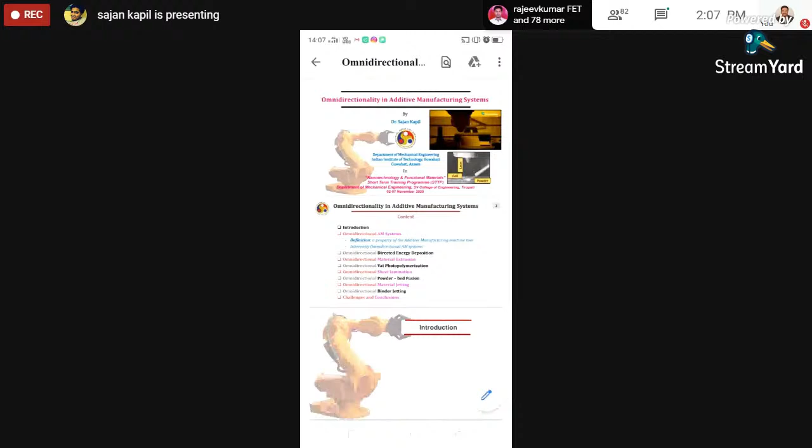Sir, sorry to disturb you, sir. Sir, if possible, if you are sending it to our team, our coordinator will share the screen, sir. You can speak from them, sir, if that is also possible. But now I think I have opened it in the right device, now I think it will be visible. Now it is correct, sir. Perfect, sir. Yes, sir, this is a convenient mobile. So I'm sorry, sir, I'll try.

Okay, so good afternoon to everyone. My name is Sajan Kapil. Today I will discuss about a very interesting phenomena which is called as omnidirectionality in additive manufacturing.

So far this phenomena was not really highlighted earlier by the experts, and we were using it since a long time. There are unfortunately some videos I may not be able to show you, but in the end of the lecture, if the internet gets established, then I can transfer to my PC and show the videos also. So you need to see a bit carefully now to the diagrams, so that I will be able to explain a few things.

So in this case, as you see on this right side diagram, there are two figures, one on the top and another on the bottom side. The top side diagram shows the latest type of DED system - DED means directed energy deposition system. While the bottom side shows the first one, which was invented in 1989 by Professor William Steen - the conventional or the first DED system.

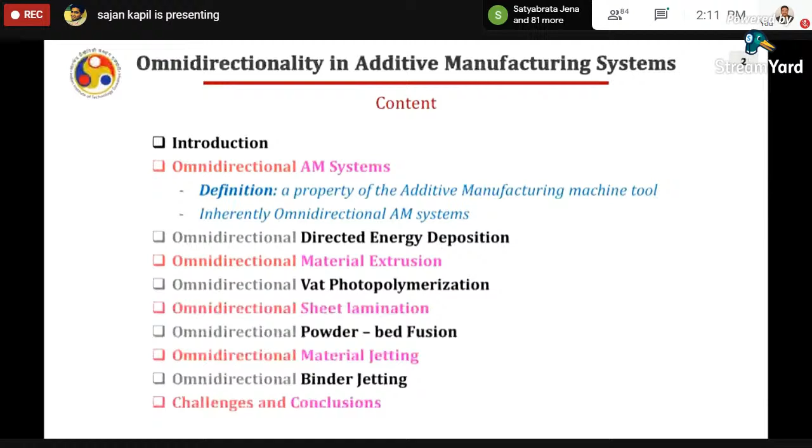So you already know what is additive manufacturing. So I'm not going to go into the details of it, but briefly I'll explain. Additive manufacturing refers to layer by layer fabrication of 3-dimensional physical models directly from computer-aided design.

It is an automatic process of manufacturing objects, parts, prototypes, tools, and even assemblies directly from the CAD model without any cutter, tool, or fixtures specific to the geometry.

In this process, we start with the pre-processing of the CAD model. We do the tessellation, we make the STL file, then we do the slicing, we add these layers together and make the final part.

If the bead is deposited or the material is deposited in the center of substrate, there is no issue. But if it is deposited on the edges, you may need some support mechanism. So we deposit the main material and support material, or the loose powder in some cases, or available material in some other form can be utilized as the support.

Like this, we build the whole part, and in the end, we remove this support. That usually comes under the post processes.

Also, as this process deals with layer by layer manner, the surface accuracy is not really that good. It depends on the layer height, which in a very accurate additive manufacturing process, which is commercially available as well, is the powder bed fusion.

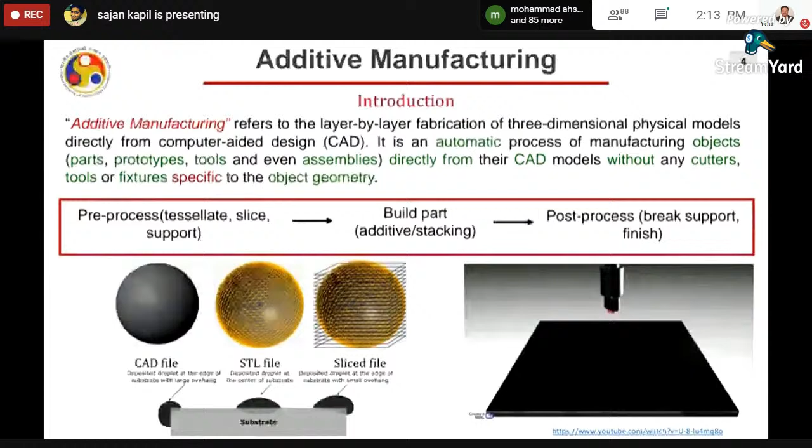Powder bed fusion goes up to 10 to 20 micron, and hence you can imagine the RA value will be very, very bad. Hence, you may need a finishing operation. So that all comes into the post processes.

So these are the 7 processes divided by ASTM, classified by ASTM.

First is vat photopolymerization. We know that in vat photopolymerization, we have a tank full of liquid photopolymeric material. From top, UV laser is used to scan the desired area, and hence the desired portion gets cured and gets added with the previous layer. In another process, which is called material jetting, we inject the material on the substrate.

It is nothing but like your 2D printer, but you can assume that in your 2D printer there is a z-axis and you keep on depositing the material, or you are actually injecting the material.

The third process is called binder jetting. In binder jetting process, we usually have a raw material on the bottom side in the form of powder bed, and from the top the binder material comes. It gets deposited wherever it is required, and hence that portion, after a certain period of time, gets cured and becomes solid.

The fourth process, which has been most extensively used till now, is material extrusion. In material extrusion, we extrude the material through a small orifice in the form of a molten material, and then it is collected on the substrate.

Wherever it gets collected, it gets solidified, and hence we build the final part. One example for material extrusion is the FDM process, which you might have definitely seen.

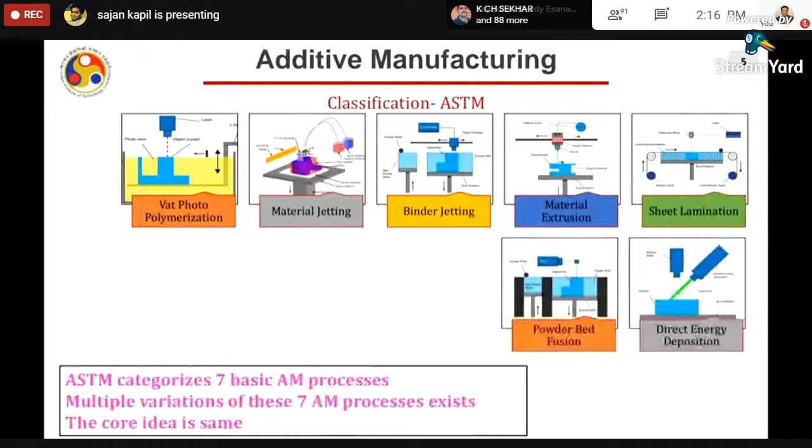The last process is direct energy deposition. In direct energy deposition, we usually do not have anything on the substrate, and the powder, wire, or sheet, or in the form of strip maybe, are fed into the molten pool, and that molten pool is created by some energy source like electron beam, laser, or a conventional welding process like TIG, plasma, or MIG.

So these are the 7 basic AM processes. There are different variants, but the core idea is the same. All these processes build parts in a layer by layer manner.

Now I've come to why ASTM has defined these processes in this manner. They started with vat photopolymerization and ended with directed energy deposition. This they have in line from vat photopolymerization to DED based on the energy consumption. It means vat photopolymerization consumes the least energy. So I'll give you an example also.

Typically, in the SLA-based process or this vat photopolymerization process, the UV light which is used is approximately 40 watts only, just 40 watts. Although, when you talk about directed energy deposition process, the lasers used here are in kilowatts. Like the one we have in IIT Guwahati as well is a wire-based DED system. The laser power is 4 kilowatts.

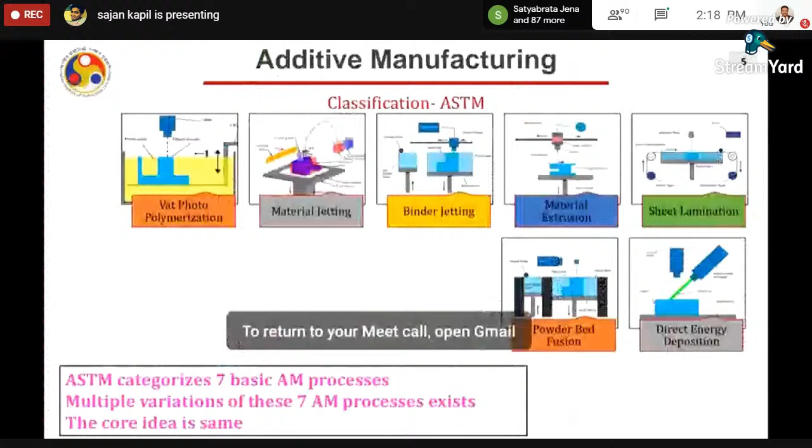So I am on slide number 5 right now. Let me just explain it a little bit again. So I was saying in ASTM they have classified from vat photopolymerization to directed energy deposition, and they inline these processes in this way because vat photopolymerization utilizes the least amount of energy. Typically, the energy is in the range of 40 watts, while in the case of directed energy deposition, the energy consumed is in kilowatts, like for example 2 to 6 kilowatts. So it is based on low energy consumption to high energy consumption.

Now, as today we are going to talk about something called omnidirectionality, let me rearrange these processes based on the process which is not at all omnidirectional. We have to provide some auxiliary machine tool elements in such a way that it becomes omnidirectional. Two, the processes that are inherently really omnidirectional - there you need not add any new thing.

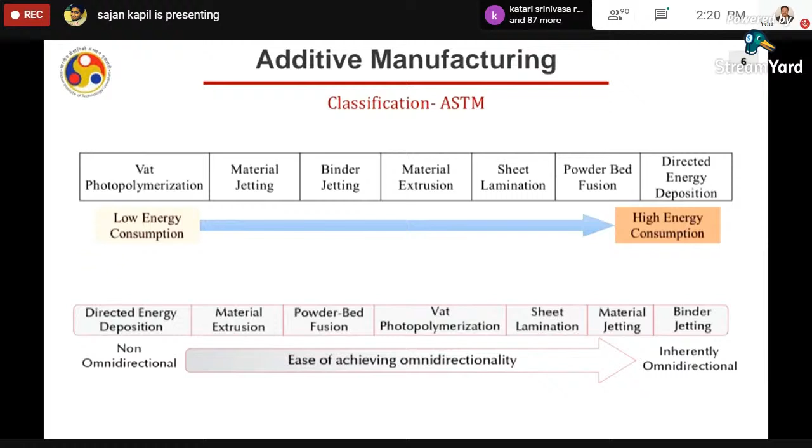Now, as I have talked a lot about omnidirectionality, let me define it. The term omnidirectional indicates an equal sensitivity of the process in all directions. In the context of additive manufacturing, omnidirectionality implies invariance of material and geometric properties regardless of the travel direction.

Omnidirectionality, more often than not, is a property of the setup or 3D printer. However, a few AM processes are inherently omnidirectional, while others are not, so we have to appropriately make them omnidirectional. So that's about additive manufacturing.

The omnidirectional wheel versus the directional wheel, which is the conventional type we use in our car. The directional wheel can go only straight, while the omnidirectional wheel can go in any direction without any turning in the axis. It can go in any direction without any additional arrangement, hence it is inherently an omnidirectional wheel.

This video I could not represent here, but you can note it down and check later. Just type on Google, and you will find omnidirectional drones recently developed by ETH Zurich. In that case, the drone can even tilt and go in any direction, unlike conventional drones. So you will get some idea of the importance of omnidirectionality.

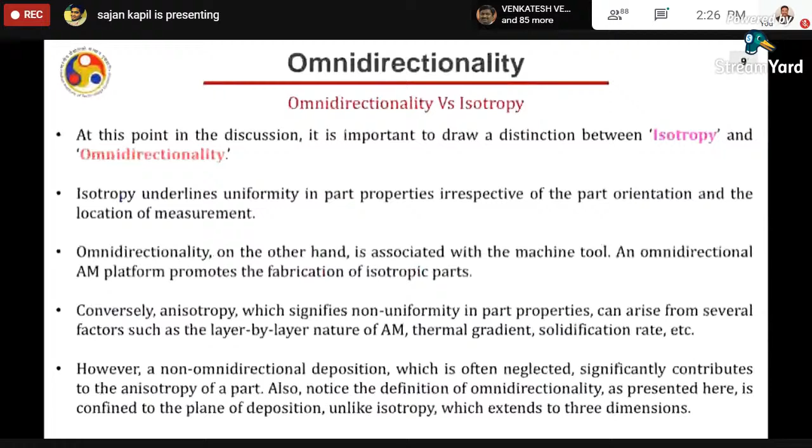The second issue we have found is the deviation in the deposition bead.

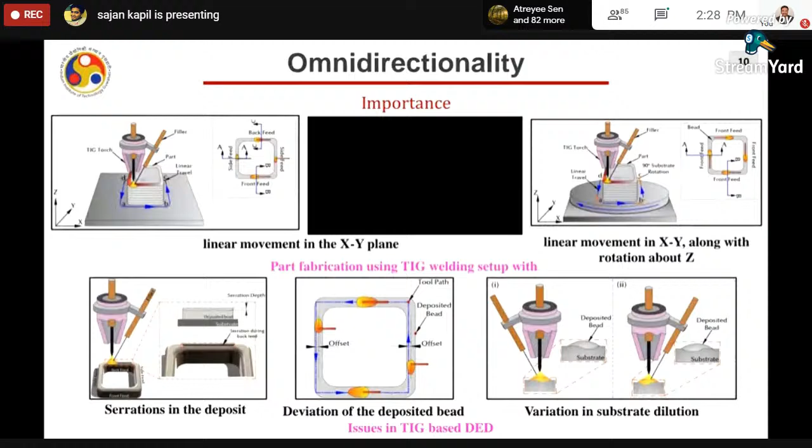And that is why we are really worried, and we want consistency. If I talk about TIG welding, I want consistency in the feeding mechanism. It should be either just front feeding all the time or by some means. So let us try to define this phenomenon mathematically so that it will be easy for us to understand and follow further.

This definition will remain true for all additive manufacturing processes. I'm saying that there are three vectors, and the directional sensitivity in additive manufacturing arises from the inconsistency between the spatial orientation of three vectors relative to each other, namely the source of fusion.

Then there is Vf. Vf shows the direction of feedstock delivery. Now the laser is coming from the top, that is always vertical, assume. Then however you are feeding wire or powder or any raw material into the molten pool, that is called the direction of delivery.

And the third vector is travel direction, usually along the path on which you are moving. So these are the three vectors. I can say strongly, if these three vectors remain consistent relative to each other throughout, the process will be omnidirectional. Otherwise, it is not going to be omnidirectional. It may behave unpredictably.

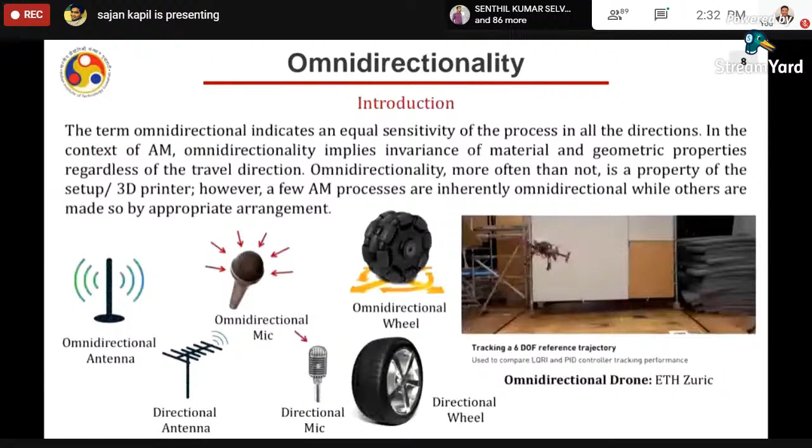What is happening? If I'm moving at a non-linear trajectory and taking a turn, then definitely the angle between Vf and Vd may change. Also, the angle between Vd and Vs may change. Hence, this process is not going to be omnidirectional because of this variance in the change in angle between the delivery direction, feeding direction, and the vector direction. This may happen because I'm moving up and down, or due to the inclination of the fusion source and travel direction. In that case, the angle between these two may change, and hence we get non-omnidirectionality in the source.

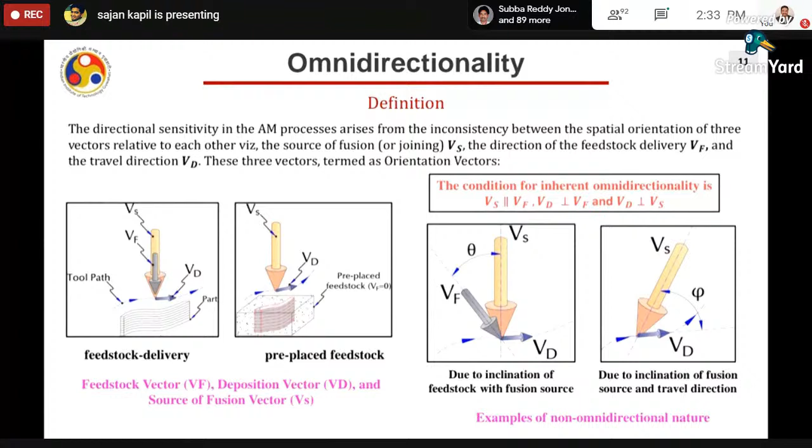Now let us discuss one by one each and every additive manufacturing process defined by ASTM, and we will also discuss how people are achieving this omnidirectionality, although till now they have not given any name to this phenomenon, but they are doing it somehow.

For directed energy deposition based AM processes, the feedstock is fed instantaneously along the vector VF into the molten pool created by the fusion source. Hence, the relative position along the source of fusion—that may be laser—VF, the direction of delivery of the powder, and VD, which is the direction of deposition, they may vary when following a nonlinear trajectory in the XY plane. It is obvious.

Although there are different types of DED processes. For example, we talk about MIG welding based processes. In MIG welding, the wire itself creates the arc. And if the wire itself is creating the arc, that means VF, the vector corresponding to feedstock, and the source are both coaxial, because the wire itself is creating the arc, and both VF and VS are always parallel. And as they both are parallel, if you are moving on a plane trajectory, for example on a plane substrate, then these vectors VF and VS will always remain perpendicular to the direction you are moving, because the gun is always vertical.

Hence this process is inherently omnidirectional. There is no need to have any additional thing in this case. So I can claim that MIG welding processes are inherently omnidirectional. That is why if you move in any direction using MIG welding, you will get the same property, and no issues will arise because of this omnidirectionality phenomenon.

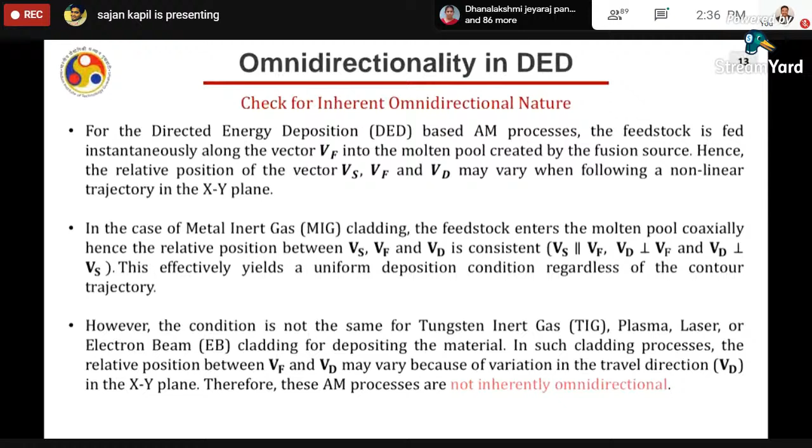So like I explained, you see in this diagram on the left side, this is MIG welding. Here VS and VF are both collinear, both coming from the top. VF and VS are related because my VF is the source of VS, and hence they will always remain perpendicular to VD wherever you move on the substrate. In that case, it is omnidirectional.

But if you see TIG, VS is vertical, created by the tungsten, while VF is fed from the side. Now if you see, VD is going in the Y direction; assume that VD is in the X direction. In that case, the angle between these two may change, and hence issues will arise. This will keep on happening—the relative position may keep changing, and the angle keeps changing too, which will create the issue for omnidirectionality.

Now we'll go to our next discussion: how can we achieve omnidirectionality? We have identified the issue. We have seen that VS, VF, and VD are not consistent in this case—their relative positions are changing. Hence we have to do something. What can we do?

Methods of achieving omnidirectionality in directed energy deposition. First is to make these two coaxial: feedstock and fusion source, which is happening in MIG welding. If you see carefully, VF is itself creating the source, VS.

But it is very difficult to do this thing with wire. We can do this with powder. Now, in the third case, it could be the coaxial feedstock surrounded by fusion source. In that case, the wire will be in the center, and your fusion source should surround the wire in a conical form. Hence, now as you move in any direction, the condition will remain symmetric. This also we will see how we can do.

Then the fourth one is dynamically adjusting the orientation vector. This is the easiest way. As you can see in the first diagram of the fourth one, the delivery angle is theta, the wire is fed, and moving direction is VD. The orange color shows the direction of fusion, which will remain same, VS is going to remain same. But as this VD is changing, the motion direction is changing, and similarly the wire should also change its direction.

I mean, now you need a continuously or dynamically changing direction of the feedstock. For that, you need a rotary feedstock, so that it can keep rotating around the fusion source in such a way that the angle between VD and VF can remain same. And obviously, the angle between the vertical, which is the fusion source, and the deposition vector is always 90 degrees, so that is not the issue. Also, the angle between the fusion source and VF is fixed because we are delivering at a particular angle only, so that may not also be the issue.

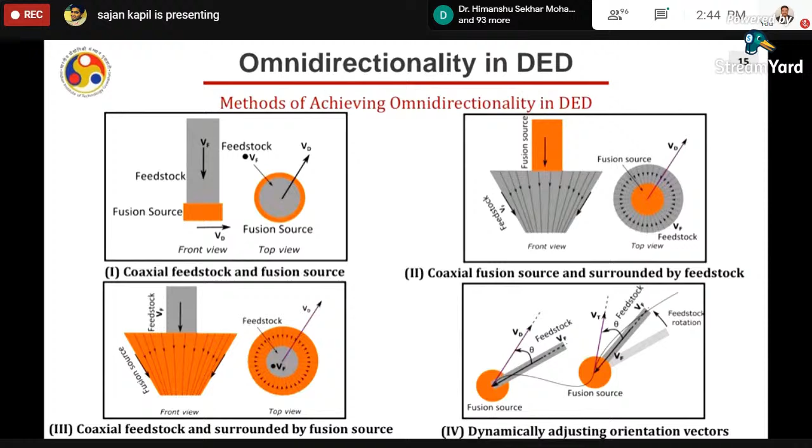Now we'll see one by one how commercially people have already adopted it. First method, let us discuss about TIG welding. We are going to implement our method 2, method 3, and method 4 for TIG welding.

The first one is coaxial fusion source surrounded by feedstock. So you can have a system like this as you are seeing in this diagram. Why is today's lecture important? For example, you want to develop your own DED system or any 3D printing or additive manufacturing system. While designing the machine tool, you should consider all these factors so that you won't have any issue related to omnidirectionality.

So what I'm claiming here is the center is the arc. So instead of feeding one wire, you can feed multiple wires, at least three. If three wires are fed into the molten pool, then you can move in any direction. It will not be exactly like a cone, like I said in the case of powder, but at least it will eliminate some issues due to the asymmetry. Now you can see the top view, if you move in any direction, it will remain approximately the same.

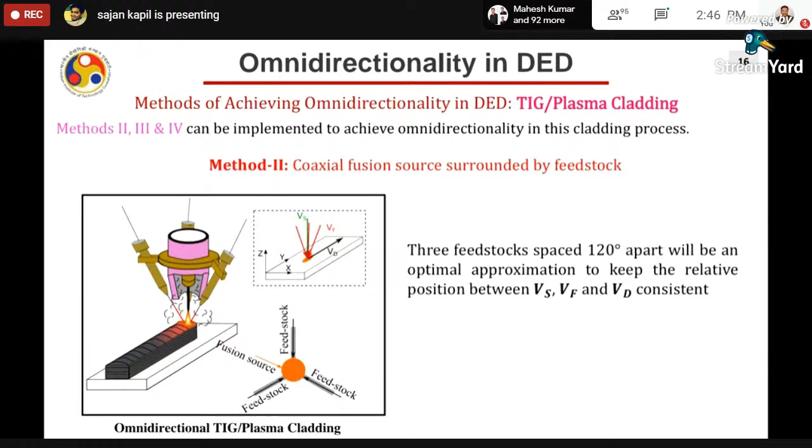However, the best possibility could be you feed a cone of powder. Wire is not possible to form a cone surrounded by the spherical molten pool, but in that case powder may be possible. But the issue here is powder cannot be used with TIG welding. Hence, this is the solution needed for TIG welding.

Now, another method - method 3 - is coaxial feedstock surrounded by the fusion source. What we are saying is, from the center, we should feed the raw material. That could be wire, obviously, because powder is not possible in the case of TIG. So wire is coming from the center, and surrounding it should be the fusion source in a conical form.

How can we do that? There are systems available - I have seen a few patents also. The tungsten is hollow, so TIG welding tungsten is hollow, and you can feed wire from the center. That hollow tungsten will create a donut-like source, and hence you will have a top view as seen on this diagram, left side and right side. These types of systems can be used. In that case also, you can move in any direction and the angles will remain consistent.

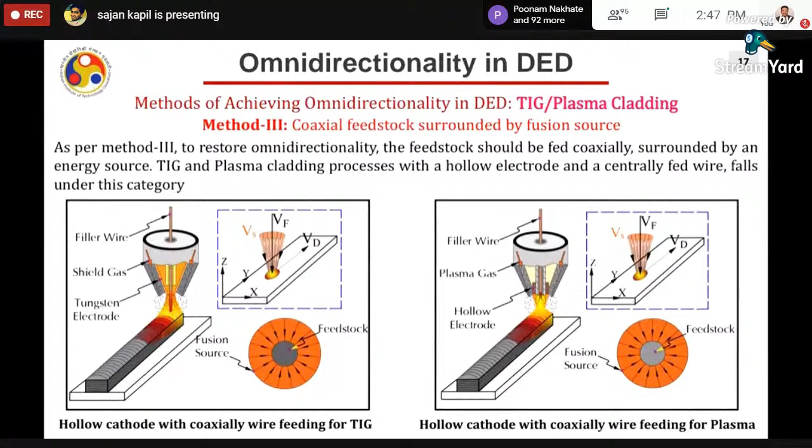Hence, the process is omnidirectional. Now the last one, which we have also developed - and from this point only, after 3 or 4 years, we got the motivation to work on the omnidirectionality phenomena - is dynamically adjusting the feedstock or deposition direction.

So what you do: you have TIG welding here, as you can see on the left side diagram. It is creating an arc and you are feeding wire from the side. Then, to maintain the direction consistent, you keep on changing the position of the substrate.

For example, you want to deposit this cylinder. If you move the whole system - TIG plus wire - around this, then back feeding, side feeding, front feeding, and again side feeding will occur. But if you keep the whole thing at the same position and instead rotate the substrate, you can easily feed the wire into the molten pool, and hence the direction between VS, VF, and VD will remain consistent.

This is called omnidirectionality through dynamic orientation of the workpiece. In that case, the workpiece should be attached to a rotary table.

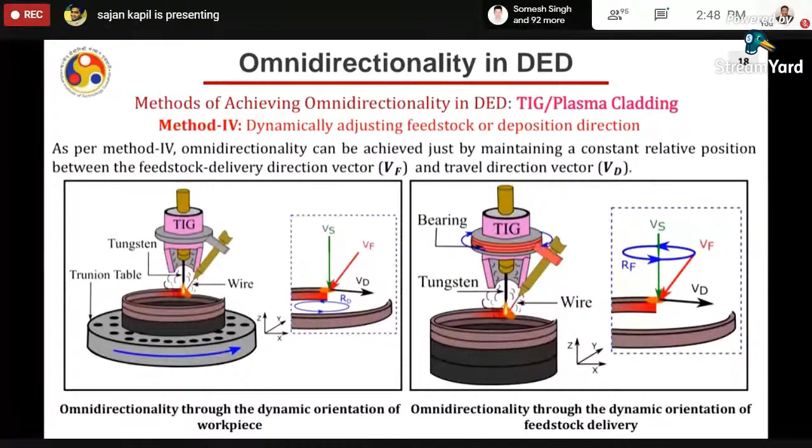Or, what you can do - and this is an arrangement we have also developed - the wire feeder should rotate around the arc, as you can see in the right side diagram. There is a bearing with the TIG welding, and on that bearing, the wire feeder rotates. So if there is a change in direction of VD as it follows a circular profile, the wire feeder will also keep on rotating. So these are the two systems.

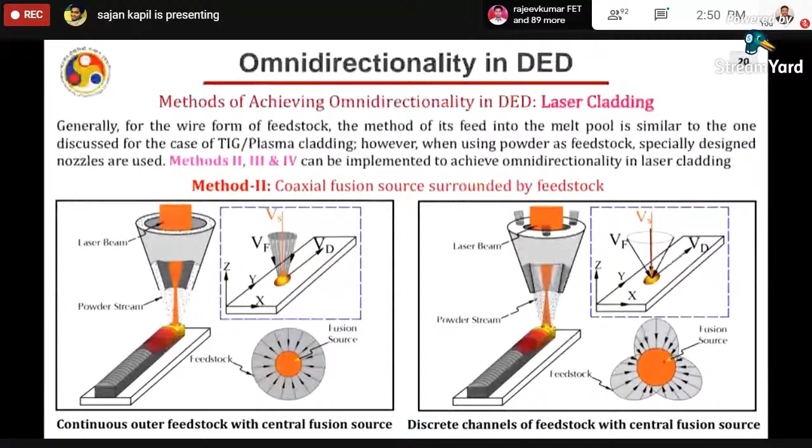In this case, you can have multiple different streams of powder, and you can make on-spot alloys. It is also similar, and the direction will remain consistent because you are feeding from all 3 sides, and hence the process becomes omnidirectional again.

It's a hollow laser that gets converged. This is very recent; I've only recently seen this process. People are moving towards this because of the very high material efficiency. Powder comes from the center, and the entire powder stream is surrounded by the laser, making sure everything gets melted and nothing is wasted. So DED efficiency may increase with these systems, and it should be called coaxial feedstock surrounded by the fusion source, with the fusion source here in the form of a cone.

Now the second one: converting a simple beam into a conical hollow beam is a space-consuming method. A hollow beam conversion requires a lot of optics. The system has already been developed.

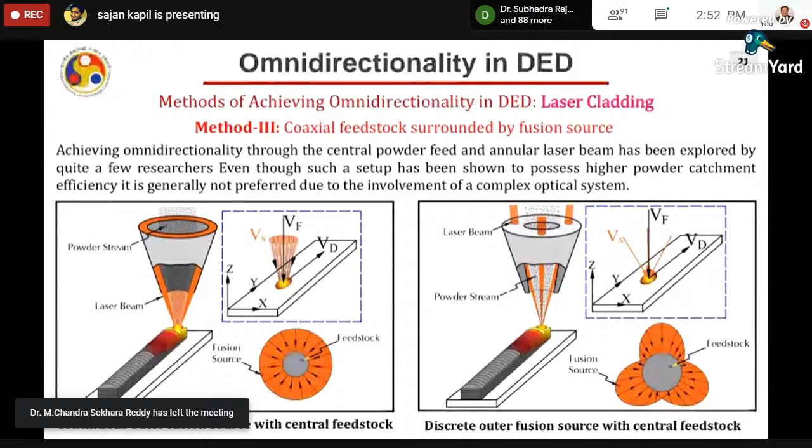Or you can use 3 different lasers. Some Chinese developers have made a system where 3 lasers are used directly and merged at a point, with powder or wire at the center. Now it is again omnidirectional. We also have a similar system developed by Fraunhofer, where they split the beam into 3 parts, with the center fed by wire, making it an omnidirectional system. I'll show the video at the end.

Now, the last method is dynamically adjusting feedstock delivery or deposition direction, like we discussed for TIG. We can do this here too. But in this method, as discussed last time, a consistent vector is maintained between VF and VD - the direction of feed wire or feed material, and the direction of deposition or the path of deposition. This method requires dynamic adjustment of either the feedstock or the substrate. This dynamic adjustment is a bit tricky because inertia is involved.

And because of the inertia involved, response time is a bit slow - you give the command, and it takes time. For example, if you are moving in a path with a sharp turn, like a V shape, when the corner comes, the process will move but the wire or laser powder delivery system will take time to reach the new position. Due to this inertia-based issue, it takes time. Also, since powder delivery is suspended in a stream of gas, rapidly changing the feed direction could lead to decreased catchment efficiency.

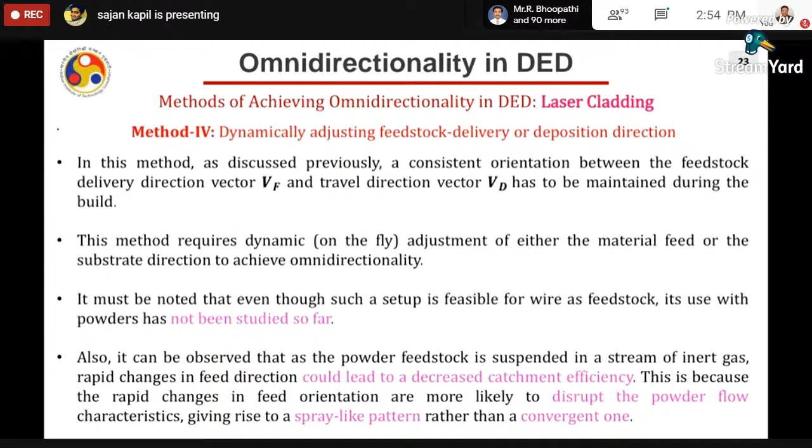Now we have already seen TIG welding and laser. Next we will discuss electron beam cladding. Electron beam cladding, which is usually performed in vacuum, is very successful for processing any metal.

Since most powder feedstock handling systems use argon to deliver the powder, the existing electron beam cladding DED processes are not designed for powder. Although here at IIT Guwahati we are trying to develop a system that can deliver powder under vacuum using gravity only, till now there is no such commercial system available. Hence, electron beam based DED systems are limited to wire only, because wire can feed without any argon.

So let us try to apply all three methods. The second is a coaxial fusion source surrounded by feedstock, meaning the electron beam comes from the center and surrounded wire comes in a similar fashion. Like in laser where we can use powder, here we cannot use powder, so only three wires can come from three sides, very similar to what we discussed for TIG. However, still no such system is available.

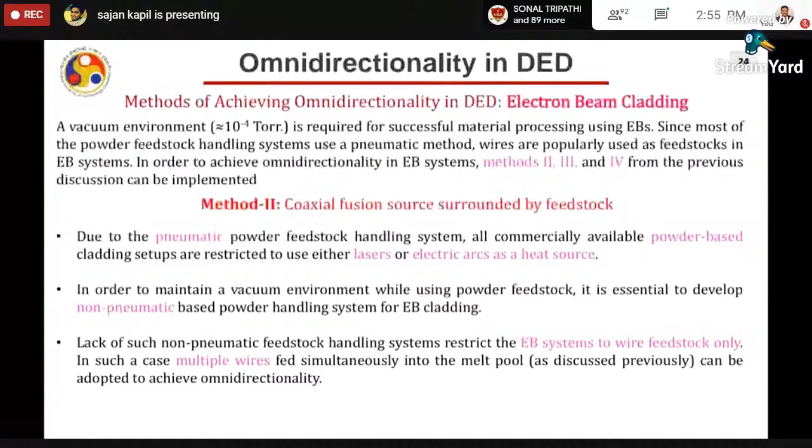Coaxial feedstock surrounded by fusion source. Like we split the laser, we can split the electron beam as well, because that can also be done easily with the help of magnetic coils. In laser, we play with the laser by optical lenses.

Here we play with the electron beam by the electromagnetic lenses, so-called. So what we can do is have a single beam of electron beam that can be split into three parts, and then again merged at a particular point to create the molten pool. In that molten pool, you can feed the wire, powder. Powder is not possible, like I said, because all are pneumatic. But if under gravity, why not? You can feed it.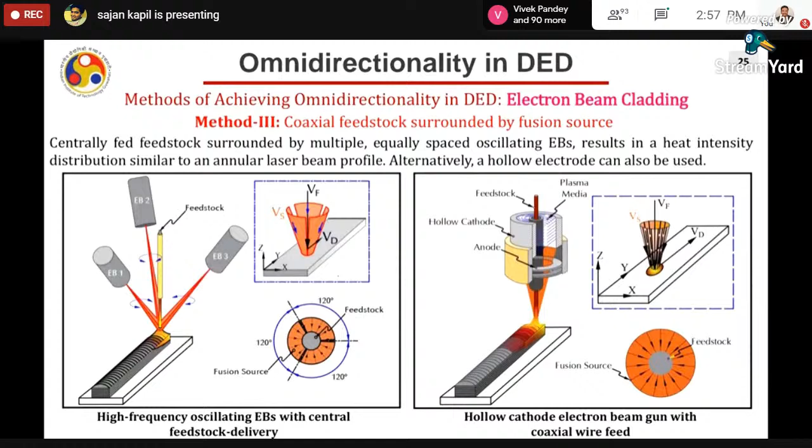You know the reason now. The reason is to achieve omnidirectionality, nothing else, or to dynamically adjust the wire feed direction.

This type of system has also been implemented by Sciaky. Sciaky is the leader for electron beam based systems for wire deposition. They have implemented this method in their commercial systems. It's a very expensive machine. If you see this video, I'll show you that.

Also, the wire is fed and can continuously rotate around the molten pool. Why does it rotate? Because they want to maintain either front feeding, back feeding, or side feeding, a particular type of feeding all the time when deposition is happening along the trajectory.

Now we'll move to another process, which is omnidirectionality in material extrusion. Material extrusion is nothing but like your FDM process. Extrusion-based AM processes are typically identified by a nozzle, also called an extruder, through which the material under pressure is forced out and deposited on the print bed.

Fused deposition modeling is the most common extrusion-based AM technology for polymers and plastics. FDM is generally assumed to be omnidirectional in nature, as the material is extruded through a circular orifice, resulting in uniform track dimensions.

But if material extrusion is in the field of construction, there's a unique challenge. Unlike FDM, where the orifice is circular, construction printers used to have a square nozzle, rectangular nozzle, or oval nozzle. This assures the ease of stacking of layers. That is why they do this.

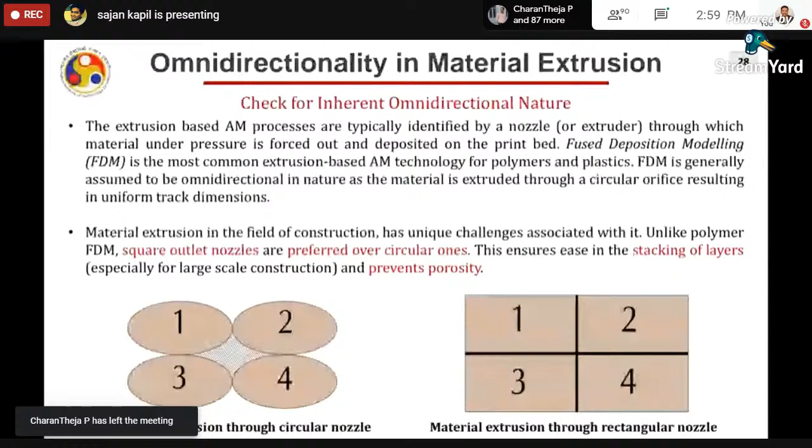Because in the FDM process, heat is involved, which makes the pre-built layer flat. This phenomenon is also called bead ironing. Bead ironing is not really possible when you deal with cold material, like in the construction industry.

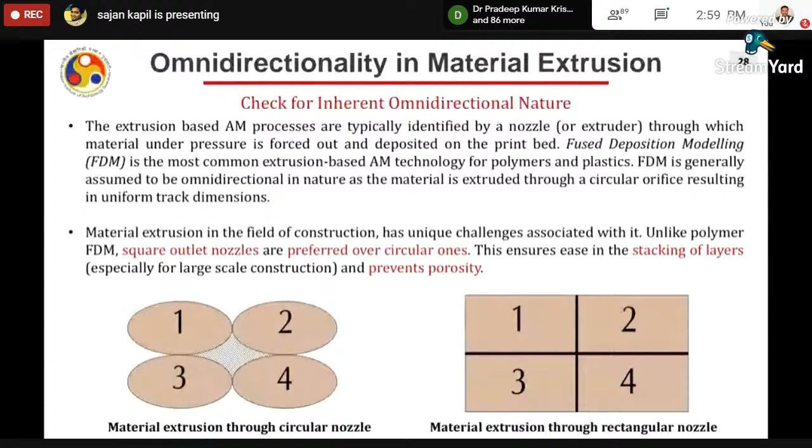Nowadays, concrete printing is very popular. In that case, you cannot really make it flat if you are not using either an oval kind of bead shape or, for example, a rectangular nozzle. Now, issues arise if you are using a rectangular nozzle—just carefully look into this diagram.

So this highlights the non-omnidirectional nature of this nozzle. What's actually happening is you're depositing different bead sizes at different locations. Hence, the process is not omnidirectional.

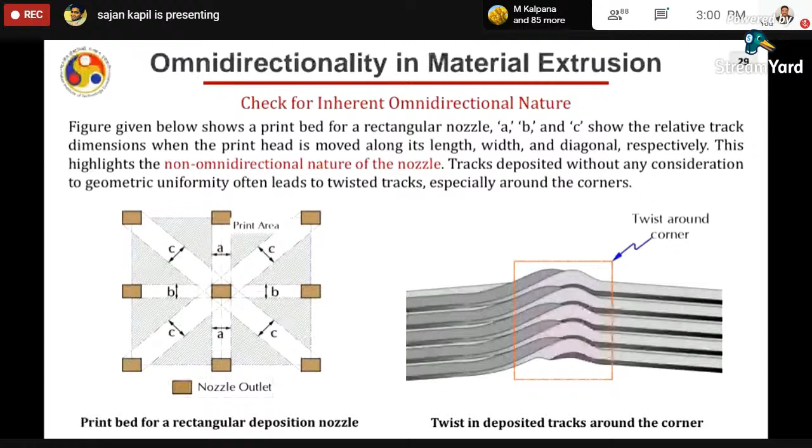Track deposition without consideration to geometric uniformity often leads to twist in the track. For example, if you are making a 90-degree turn, a twist will definitely occur in the deposition. If you think of it, you're depositing with a rectangular bead and take a 90-degree turn. What will happen? A twist will happen on the corners.

What we need is to implement a method. Mostly in this type of system, method 4, which is dynamically adjusting the feedstock delivery for deposition direction, is implemented. Similar to TIG and plasma, in this method, the deposition head is held vertically and stationary while the substrate orients itself based on the geometry of the path, or sometimes the head also rotates.

As you can see in this diagram, when moving on a nonlinear trajectory, the head is also rotating. It is not coming in a straight line. If the head came in a straight line, you would achieve different widths in between. Hence, to make the process omnidirectional, you need to rotate it. And this is all happening because of these three vectors—one of these vectors is creating the issue.

In this video, I'll show at the end how this head is rotating while depositing, and then you will have the answer for why they are rotating the head. They are doing nothing but trying to achieve omnidirectionality.

Now we'll move to vat photopolymerization. Today my objective is to show you that each and every AM process uses some auxiliary system to get this omnidirectionality, but today what we are trying to do is give a name to it. So most stereolithography processes use a galvanometer.

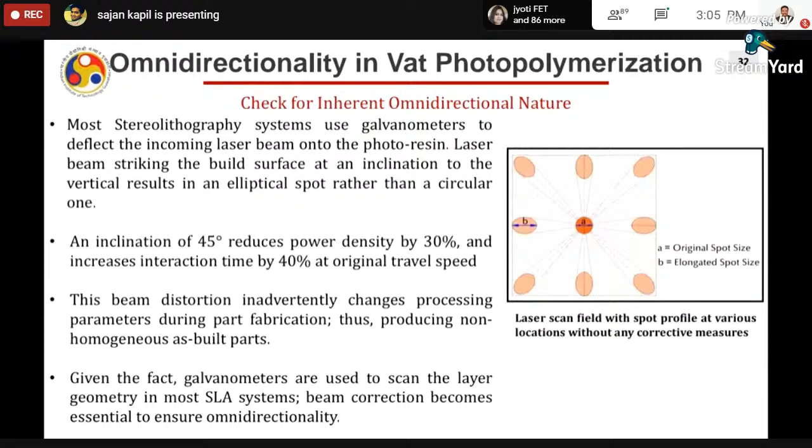From the above discussion, it can be inferred that vat photopolymerization is pre-placed, as I have already explained, where the energy beam VS does not remain perpendicular to the travel direction VD throughout the build. It changes—some angle comes in. In the center, it is 90; away from it, it's something else. Thus, the process is not inherently omnidirectional. Therefore, we have to implement something.

In succession to our previous discussion, we have discussed 4 methods. Here, a new method is going to come, called fusion source beam correction, to ensure omnidirectionality in this case. How do we achieve this? We actually correct the beam.

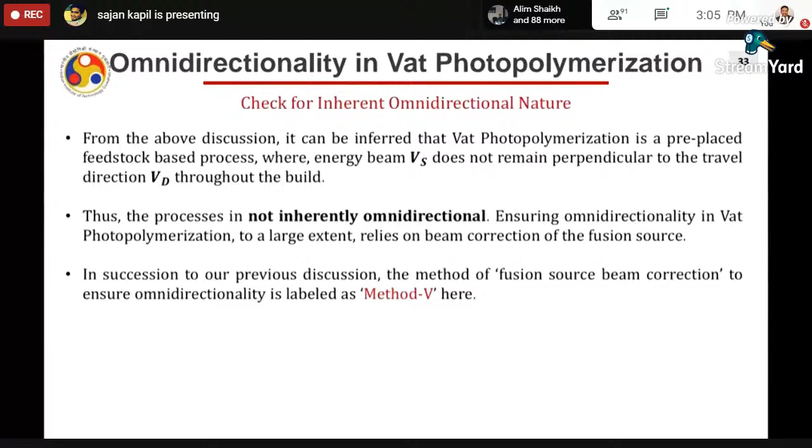How do we do that? There is something called F-theta lenses. A galvanometric system is restricted to moving the beam in the XY plane rather than moving the workpiece or the laser head, unlike flying optics—which I'll explain to you. Why do we use this galvanometer? Because we can move our beam, we can deflect the beam at a very high speed, up to 1000 mm per minute.

This low weight of the mirror in the galvanometer allows those mirrors to keep reflecting and move the laser beam on the bed at very high speed. But as you see in the left side diagram, the focal point will remain circular only at the position on the trajectory shown in blue color, that is the circular path. You can appreciate this because only in this path will the cross section be circular. But if it falls away from this, the focal length will change, and hence your diameter will be something else.

Therefore, you need a correction. You need to change the focal length. How can we do that? There are some lenses. As you see on the right side, immediately after getting deflected from the galvanometer, the laser beam strikes the F-theta lens. F-theta means it corrects the focal length based on the angle of incidence, that is theta. So even if theta is changing, the focal length remains the same, and it falls almost vertically, as you see here.

In that case, what have they corrected? They have done nothing except maintain the direction of the vector of the fusion source, VS. So VS is now perpendicular to VD all the time, and hence we can say this process is now omnidirectional, but only when you implement this F-theta lens. So this is the fifth method, which we call fusion source beam correction, GSS based method.

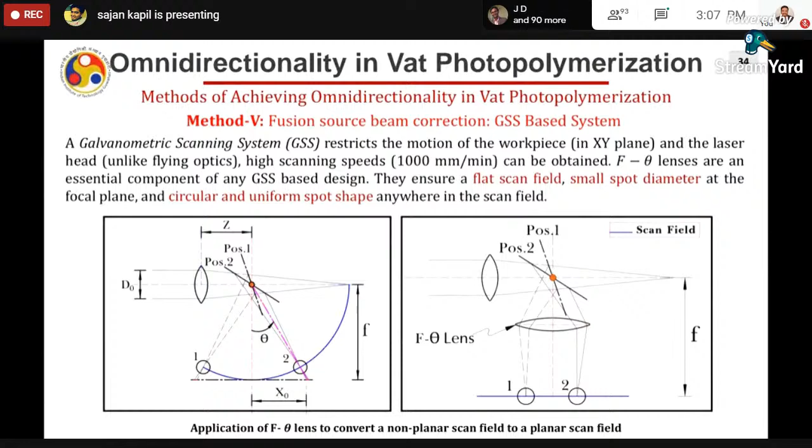Other than that, a very simple solution: unlike the galvanometer, where we use a mirror to deflect the beam, use flying optics. Flying optics means you mount your laser head on an XY table, or you keep your powder or liquid bed on the XY table and move it under the laser.

We know that liquid based systems are the most accurate additive manufacturing systems, producing layer thickness up to 5 microns or even less. In that case, they are the best additive manufacturing process, and can give you the surface accuracy. But if you move something, some waviness will appear in the vat tank, so you may have issues. You have to move very slowly if you want to move either of these two things, so the system becomes slow, scanning speed goes down, but the process remains omnidirectional.

Therefore, I would like to mention, since the focus of this workshop is on micro devices, if you want to develop a photopolymerization based system but want to focus really on accuracy, instead of going for the galvanometer, go for a flying optics based system for a large tank. The process will be slow, but you will be able to get really micro level parts.

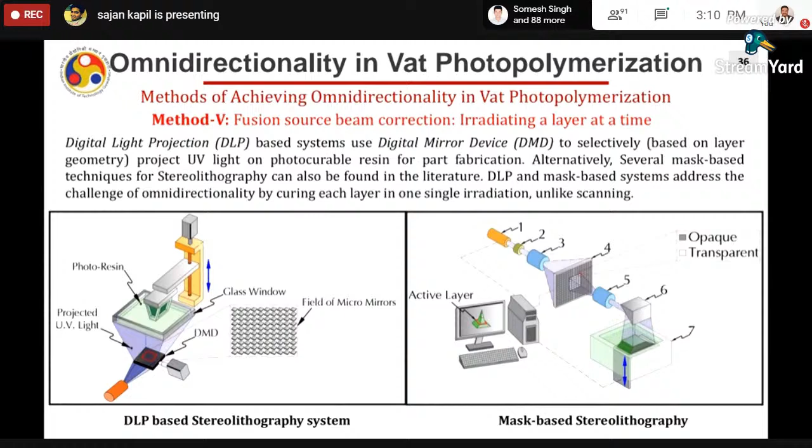So this is the sub-method of method 5, that is the fusion source correction by irradiating a layer at a time.

Can I take a 1 minute break? Yes, sir, yes, sir, yes, sir. Sorry, yes, sir. Sir, I'm in a lecture. I'll be done in 20 minutes, by 3:30. Oh okay, sir, so after 3:30.

Okay, so omnidirectionality in sheet lamination. In the case of sheet lamination based processes like FSW, I think I've already given a brief highlight of how FSW can be used.

Sheet lamination is an AM process that employs pre-placed feedstock. In this, the feedstock doesn't move. Shaping the feedstock corresponding to the layer geometry can be carried out by multiple means. For example, in the case of paper, if I want to join two papers together, the layer is carved either by mechanical knife or laser, and then they are joined together.

Also, the source of fusion for various sheet-based processes is different. In the case of metal, it may be ultrasonic vibration, it can be FSW as I mentioned, or it can be chemical or adhesion based.

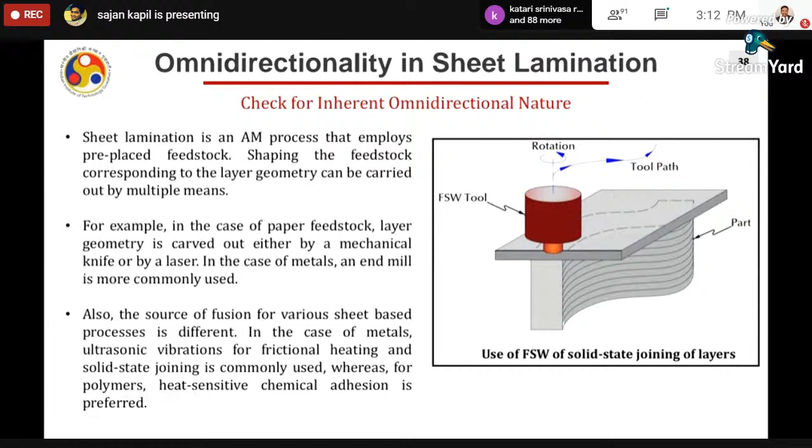Now let us check the omnidirectionality of sheet-based processes. Sheet-based AM processes fall under the category of inherent omnidirectional. They are always this way, because your fusion source is always vertical, the sheet is always at 0, and direction is always changing. As the source is always vertical, they are inherently omnidirectional.

But there is laminated object manufacturing of paper where a knife is used to cut the layer. In that case, some issue comes into the picture. If you are cutting by laser, then definitely you can use f-theta lenses and make the process omnidirectional, not an issue. But if you are using a knife, the knife is not an omnidirectional tool.

So you are cutting a layer by using the knife and then stacking it. That is how it happened in the LOM process, laminated object manufacturing by Kira, K-I-R-A, Kira's LOM. In that process, they cut the layer and then join this layer with the previous surface. If a knife is used, what may happen?

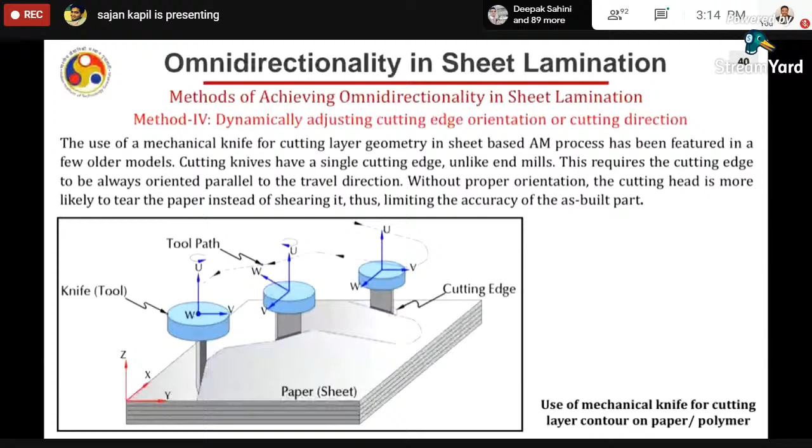The knife has to cut the sheet. And as you can easily appreciate, if you are changing the direction, then the direction of the knife should also change. It is quite obvious, hence the process will only be omnidirectional if you provide some rotary axis with the knife, and hence the process will require an additional controller.

Or you can use an energy beam. Then definitely you can eliminate this issue by applying f-theta lenses.

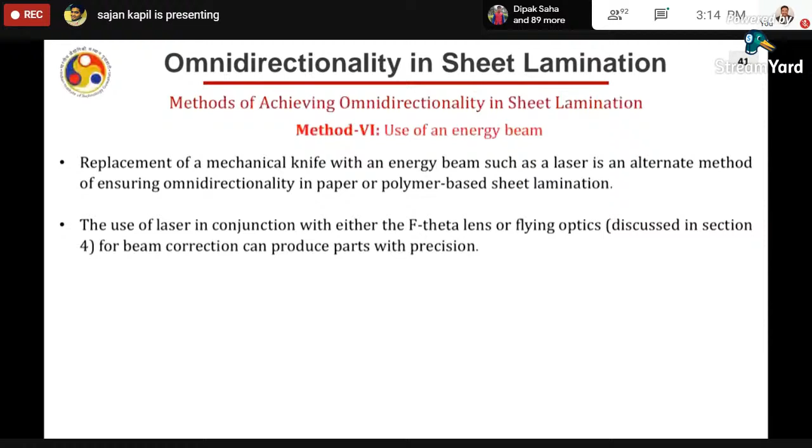Now, as my discussion is going on, you can observe that the processes I'm discussing now are more inherently omnidirectional. We discussed a lot when we were discussing DED, then after that powder bed fusion, and UV light based systems like vat photopolymerization. But now slowly you will see the processes are inherently omnidirectional, where auxiliary arrangements are really not required.

For example, powder bed fusion is very similar to vat photopolymerization. Instead of the liquid bed, here the laser will be on top, and a high power laser will be scanned by galvanometers.

Here also you can apply method 5A and B, where you can use either f-theta lenses or move the beam using flying optics. So here again the representation is there.

So for any system you're going to buy for powder bed fusion, you can always ask what the mechanism for beam correction is. They will say there is optics for beam correction, or there is an f-theta lens mounted that will correct the beam shape.

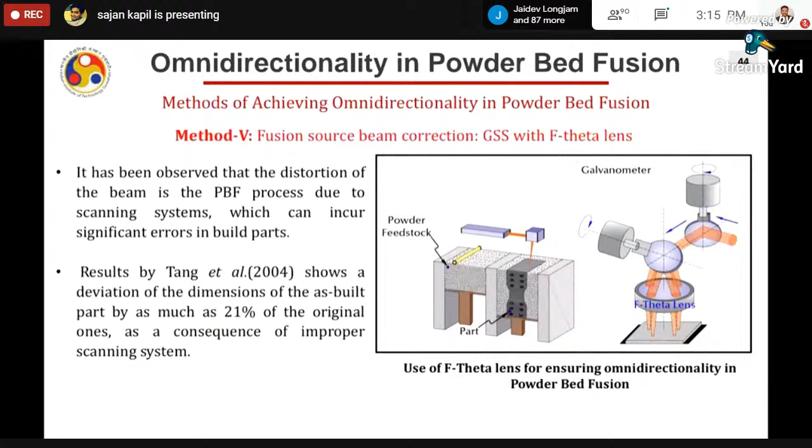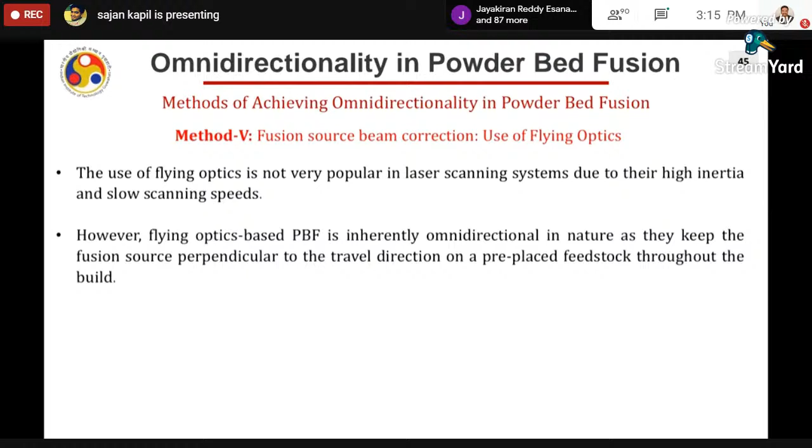Or another method is to use flying optics in a very similar fashion. Flying optics means you move your laser beam on the bed in such a way that the laser will always remain perpendicular.

The binder is already mixed with the material, so there is no need for any additional source vector here. That means Vs and Vf will remain parallel to each other because they are mixed at the beginning, and you are always depositing perpendicular to the substrate. But if you are injecting it at an angle, that is the issue. Usually, though, we do not do that.

In any additive manufacturing process, when you look for it, you can observe, for example, in Objet, the process where material jetting happens, material is always falling perpendicular to the substrate. Then there is no issue. But if there is an inclination, then issues may come.

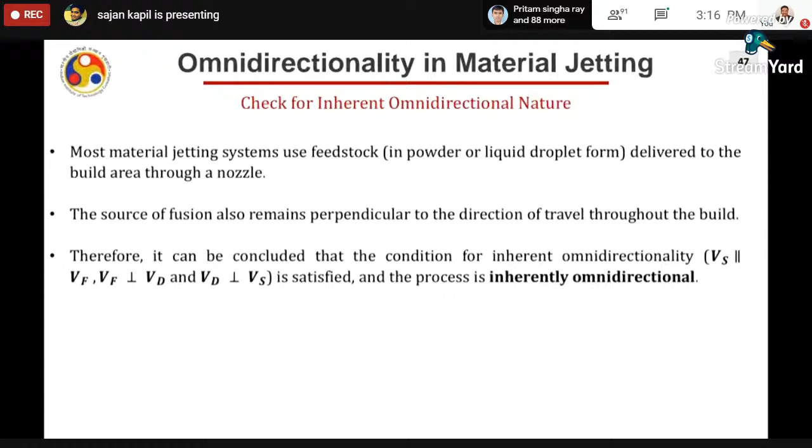As you can see here, the particle—this is another process for material jetting apart from the non-metals. Apart from non-metal, this is the metal-based process called cold spray. In this, material is jetted onto the substrate and it is always perpendicular, so there is no issue.

Omnidirectionality in binder jetting. Binder jetting means, in this case, on the substrate you have powder, and from the top the binder will come.

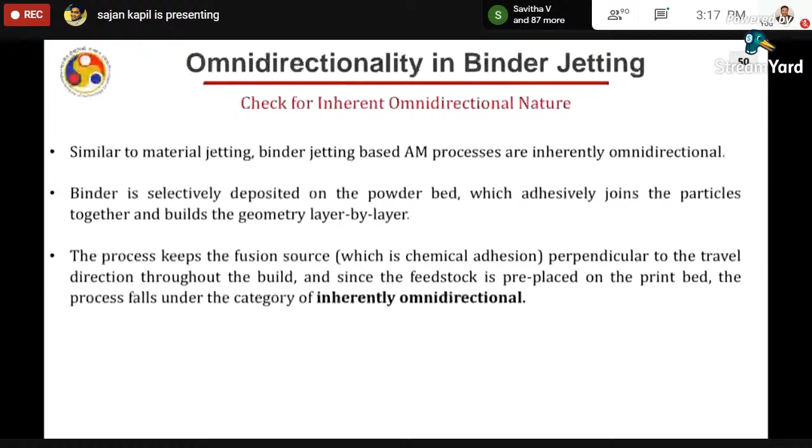Similar to material jetting, binder jetting based processes are also inherently omnidirectional because binder is selectively deposited on the powder bed, which adhesively joins the particles together with the build geometry layer by layer. This process keeps the fusion source, which is chemical adhesion, perpendicular to the travel direction throughout the build. Since the feedstock has zero velocity, that is Vf is zero on the print bed, the process falls under the category of inherently omnidirectional.

Now I'll conclude this presentation with some remarks, and then I'll try to connect the PC again to show you at least 2-3 videos quickly.

The selection of an appropriate method to achieve omnidirectionality for any given problem requires careful consideration of various factors. More often than not, the selection criteria mostly involve establishing a balanced trade-off between various desired outputs. But that should not be the case.

For example, in method 5, we use flying optics for beam correction in vat photopolymer, and powder bed fusion provides a robust solution to achieve omnidirectionality, at least for micro components. Those could be the best methods, but really, till now, nobody has explored these methods much.

On the other hand, the use of galvanometric systems with f-theta lenses provides high print speed, definitely, but they are limited to smaller print area. That is why we all have a limited print area in the powder bed technology. Usually they are limited to 300 by 300 by 300 millimeter.

Height doesn't matter, but the XY is something really important. They really can't go beyond 300 by 300 by 300 with a single laser, and that too is the largest, I think, by DMG Mori. Otherwise, they are limited to 250 by 250, and height can be like anything, but usually 250.

Just a summary, I'm going to tell the limitations and the advantages. Method 1, which is coaxial feedstock and fusion source, is the best method, but only limited to MIG cladding.

Method 2, where coaxial fusion source is surrounded by feedstock, meaning center laser or center electron beam surrounded by feedstock, can be different types, like discrete multiple nozzles you can feed, but relatively low catchment efficiency. You can use conical form of powder, but in that case you cannot tilt the head. If you tilt the head, the density on the cone will be different.

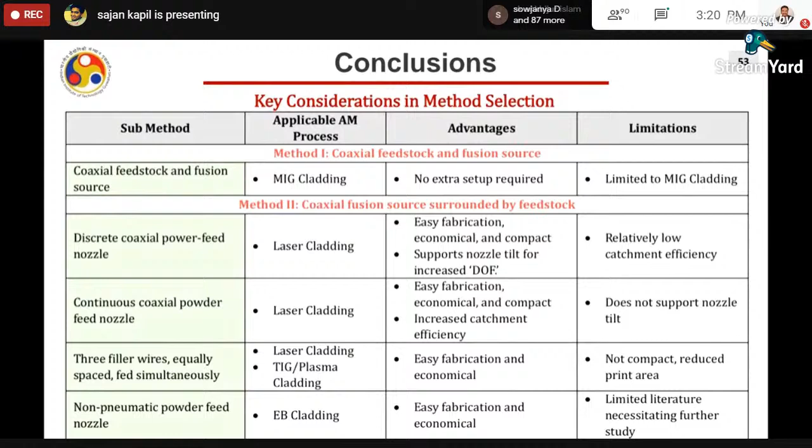We'll see. Then method 3 is coaxial feedstock by fusion source, in which the center will be the feedstock and from surrounding, the fusion source will come. We have seen in laser cladding it can be achieved, but manipulating the shape of the laser is a bit difficult. Only experts can do that.

Laser cladding and electron beam cladding with 3 beams, yes, that is easy. You can easily mount 3 guns. Like I said, there are also a few Chinese systems. They need not have expertise in the laser. Just buy 3 systems, 3 lasers, mount them at an angle of 120 degrees and do the job.

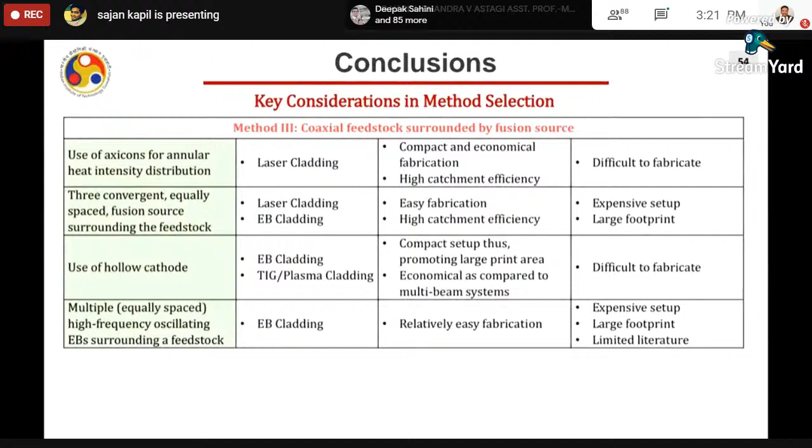You can use a hollow cathode, but it's difficult to fabricate such cathodes. Multiple equally spaced high frequency oscillating electron beams can be used, but again the setup will be expensive and expertise in electron beam is required. That too is limited in the literature, and this type of system is going to be developed at IIT Bombay.

Dynamically adjusting the feedstock is the easiest way to do that. Dynamically, you either change the orientation of the deposition vector by changing the direction of the feedstock or substrate. It is slow in response. Additional setups are required, making it difficult to integrate with the system. Response time is the major issue in this case.

Like if I'm going with a very high speed, it takes some time to take the new position when we deposit on a nonlinear trajectory.

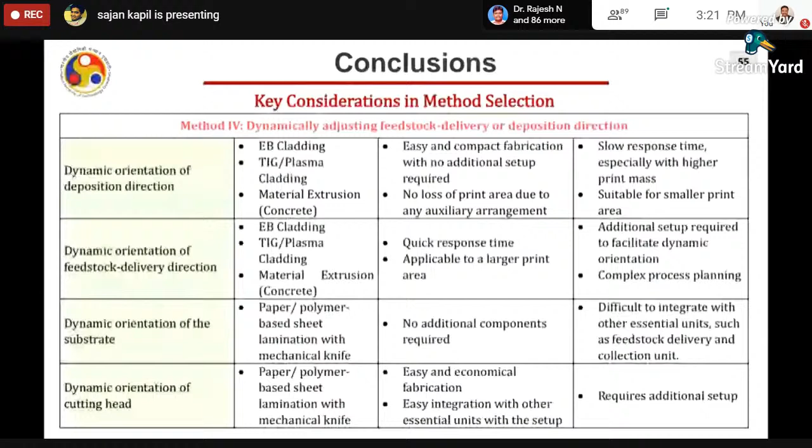Fusion source beam correction is obviously a method in which we can correct the shape, but it's still complex fabrication. You need to have knowledge of the lenses, like in the case of laser, it is f-theta lenses.

Definitely you can use flying optics, like I said, but the process is slower. Otherwise, it is very robust. For irradiation at a time, you usually need a small printing area, like in the projection system, and you need to have the DMD system. You have to buy the digital mirror devices in that case.

Or you can use a high energy beam. In that case, again, you can use flying optics, or you can replace the cutting tool, like in the case of a knife, with the laser beam. So the knife can be easily replaced by the laser beam, but again, the printing area will reduce.

Or you can replace the knife by flying optics. Flying means the laser beam can move, but again it will become slow. So this use of energy beam method 6, which I'm talking about, is only for paper.

Final remarks for this are: the omnidirectionality implies invariance in the material and geometric property of as-built part process across various AM platforms. The processes of binder jetting and material jetting are inherently omnidirectional. So whenever you are buying any of this kind of system, you need not worry much.

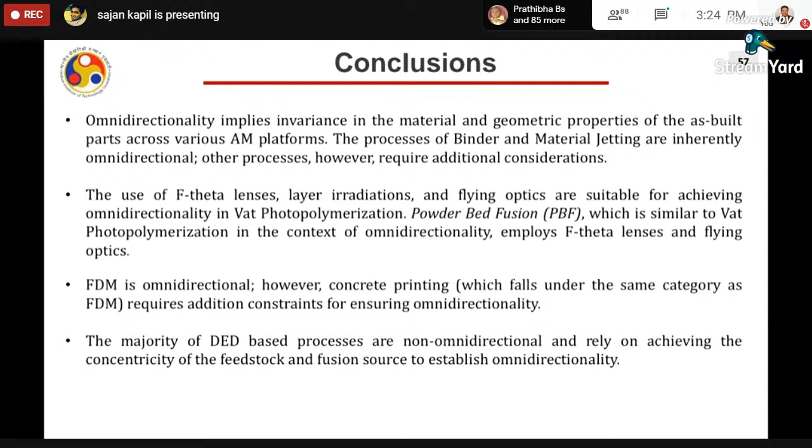Now I'll try to connect through my PC at least once, and I'll try to show you the videos if possible. Otherwise, we can stop here. We will wait, sir. You please connect with your system, sir. We will see that video, sir. Yeah, I'll try.

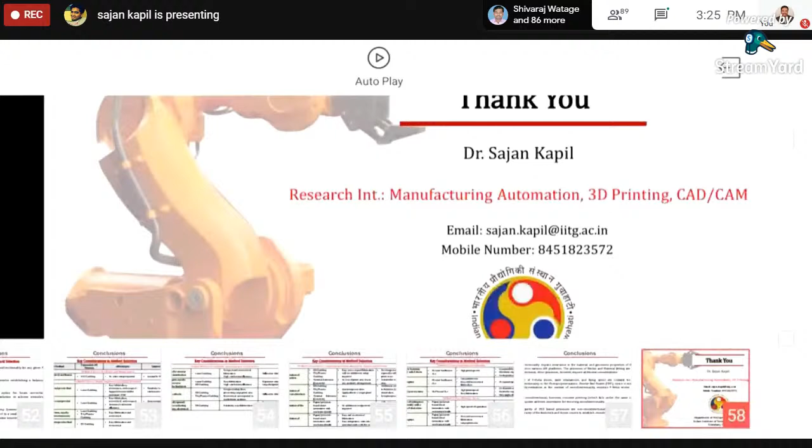So I have connected here. I hope you are able to see. Okay, this is my presentation only. Now I'm going to stop. How to stop here? Now I'll try to share from here. I hope you are able to see. Yes sir, coming sir. So you can see that.

Sir, video is stopped, sir. Stop now. Yes sir, yes sir. Yeah, it's again connecting. Yes sir.

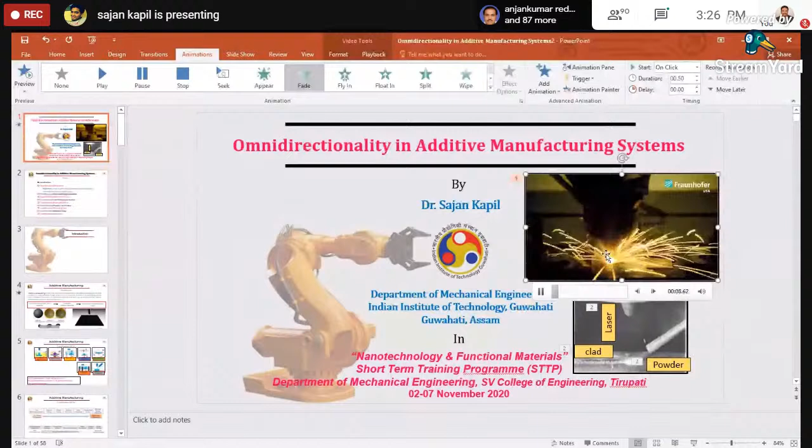Okay, what I'll do, I'll just try to show it. Okay, let us do this today. What I'll do, I'll share the screen. I'll disconnect here, and instead I will switch on my camera, but I'll show. Okay sir, you can see. Yes sir, yes sir.

So I was talking about the DED system. You have already seen the DED. Now I'll show you how it is happening in the case of TIG welding. If you see this video carefully.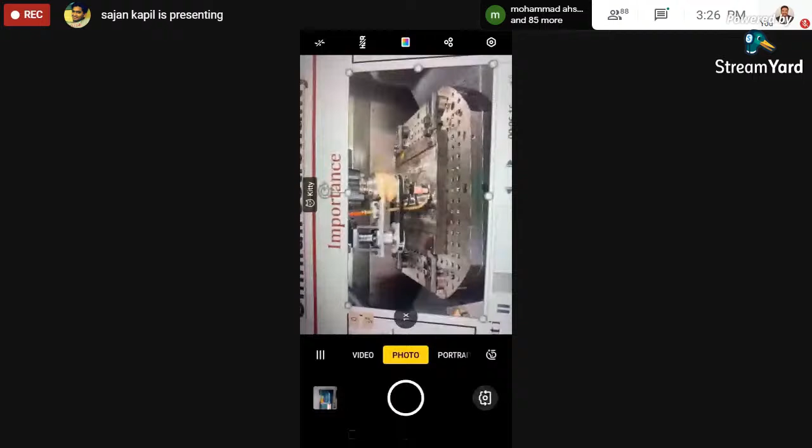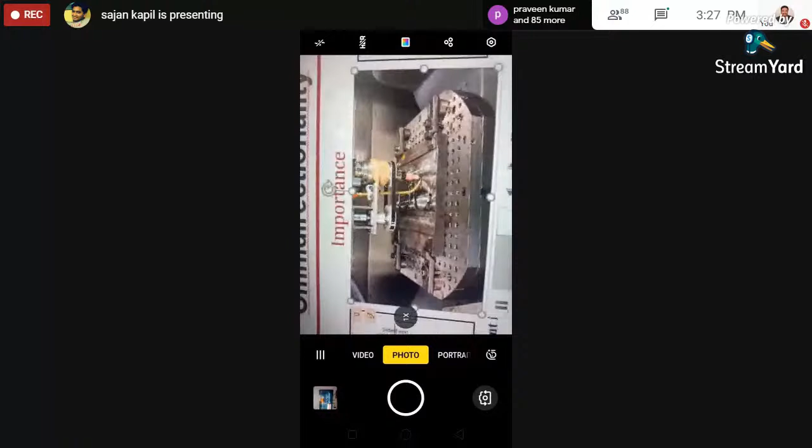It is moving in a circular direction. Right now it is front feeding. Now it is becoming side feeding. Now it is becoming back feeding. This is what used to happen. Then again it becomes side feeding. We don't want that. So for that, the solutions, I have already explained everything.

Only the solutions I'll show you. Two solutions I have suggested. One is rotate the substrate. So what we can do, if you see carefully, in the same case I'm trying to deposit while rotating the substrate. It is front feeding, right? And hence the consistent deposition.

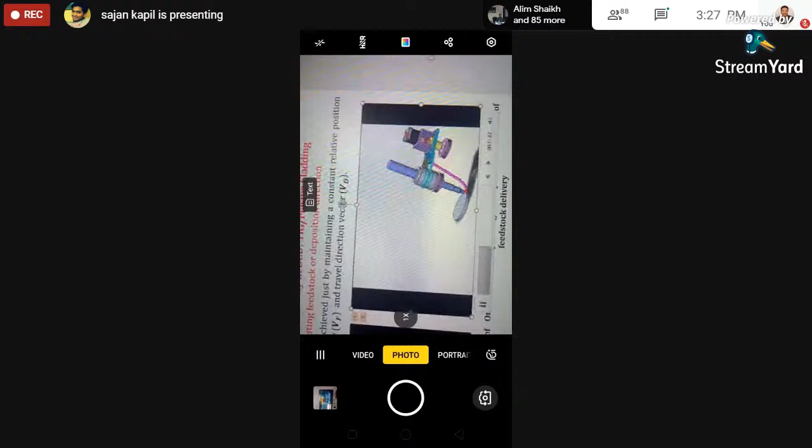Then again, in another case, if you see, the rotating wire feeder. Here I'm rotating the wire feeder.

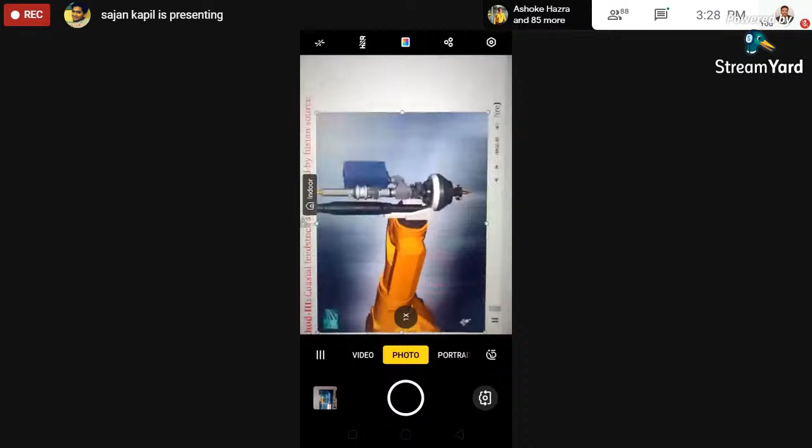The other system is a split laser beam. In this case, if you see, this is a system developed by Fraunhofer. The center has the wire, and 3 beams are coming from 3 sides, creating a uniform molten pool around the wire, and hence the process can become omnidirectional. It can move in any direction.

Now I'll show you how it happened in Sciaky, electron beam. They also rotate. If you see that, they have an additional C-axis which is continuously rotating. So this C-axis keeps on rotating while they make the circular or any kind of geometry. They used to rotate the substrate in this case.

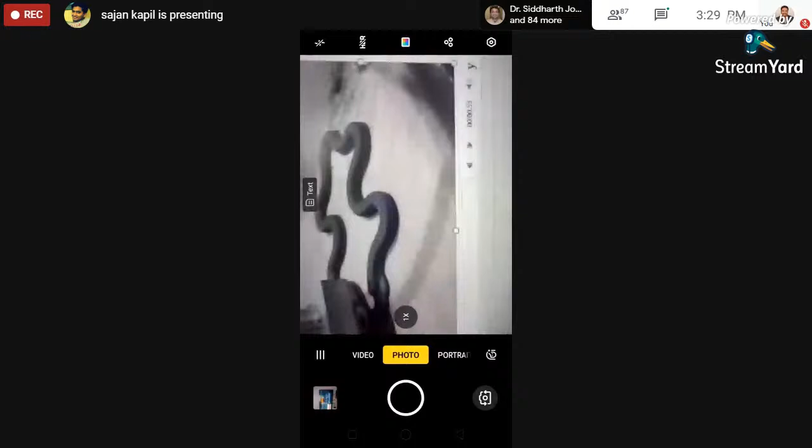Other than that, I'll just show you the video which is of concrete printing. Here also you can see carefully the bottom part is rotating, right? It is rotating only because it wants to accommodate the errors on the corners. Otherwise, the corners will bend.

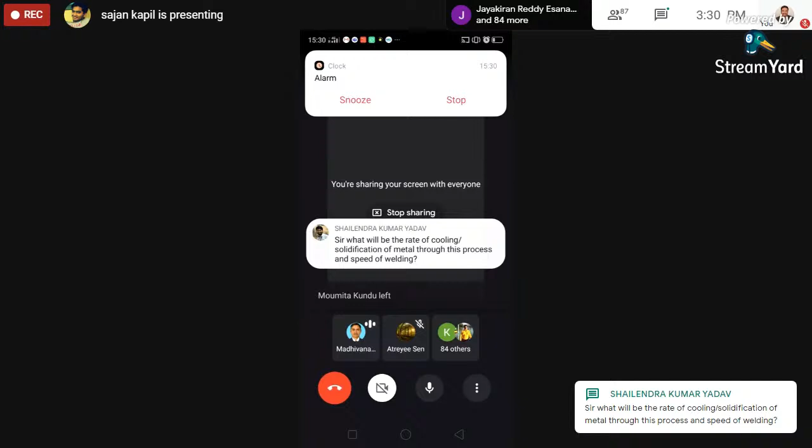This is the question from Shailendra Kumar Yadav: Sir, what will be the rate of cooling or solidification of metal through this process and the speed of welding?

Okay, which process are you talking about? It is not mentioned, sir, through this process means the additive process. TIG, fine. So TIG usually gives you 15 grams per minute, and then you can consider the cooling rate. It keeps on changing. If you have a large substrate, the cooling rate will be something else. If you keep on building and reach a top level, a very thin wall will be there to transfer the heat, so I cannot really comment on the cooling rate. It depends on where you are printing. If you are printing on the substrate, the cooling rate will be high. If you are printing on top of some layer, at a height, then the conduction will be less, only convection will be the major phenomena. So it keeps on changing.